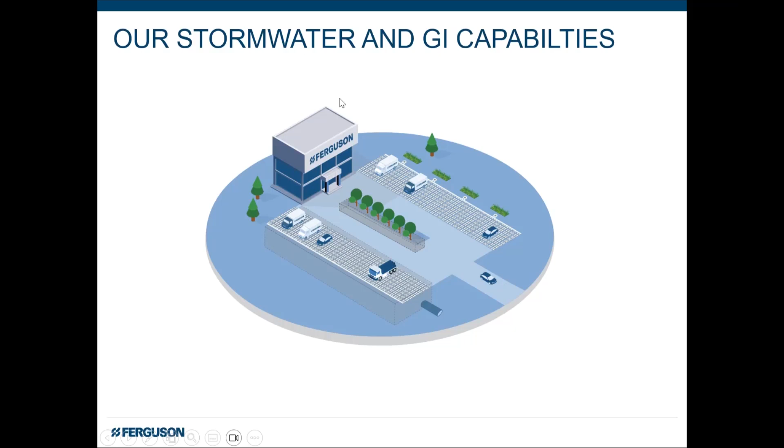To give you some background, I just want you to know kind of where we come from. Ferguson Waterworks, we are a stormwater distribution company. We sell products, anything you can think of in the water industry. I think that's really important because as we talk about collaboration today, it's really important to have that product expert near you, involved in your project, so that when a challenge comes up that can't be solved with something natural, there are products out there we can use to solve some of those challenges. As Bob mentioned, I work specifically in the green infrastructure space.

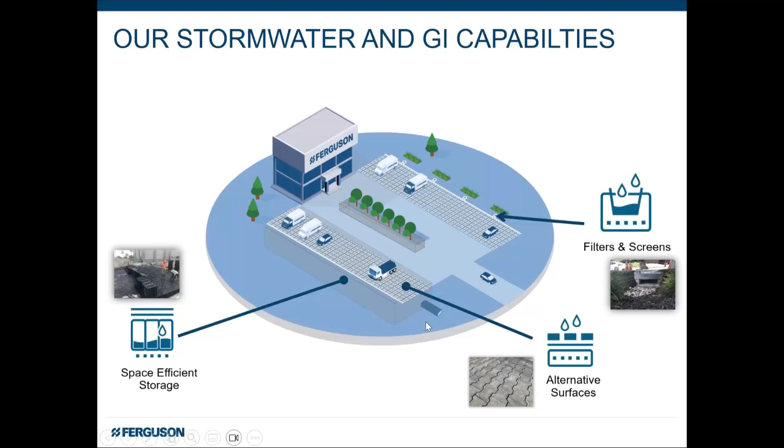Our products are categorized into five categories: space efficient storage, alternative or porous surfaces, which I'm going to talk about today, filters and screens for pretreatment, which I'm also going to talk about today, media and biofiltration for cleaning stormwater and managing volume, and something really cool we've been getting involved in, urban landscapes—essentially creating healthy places for urban trees and plants to thrive.

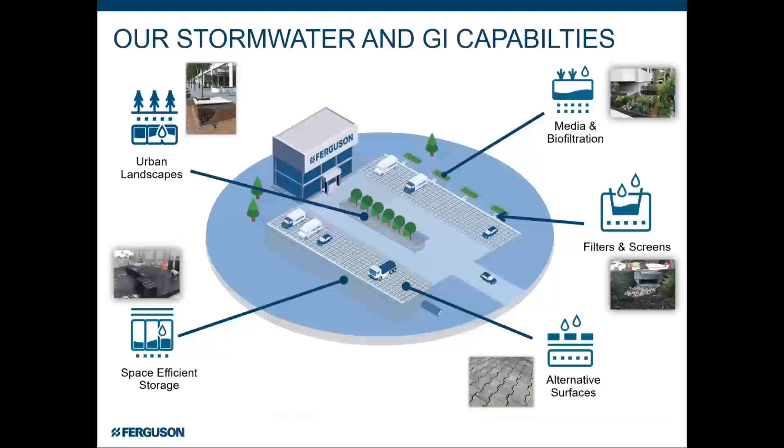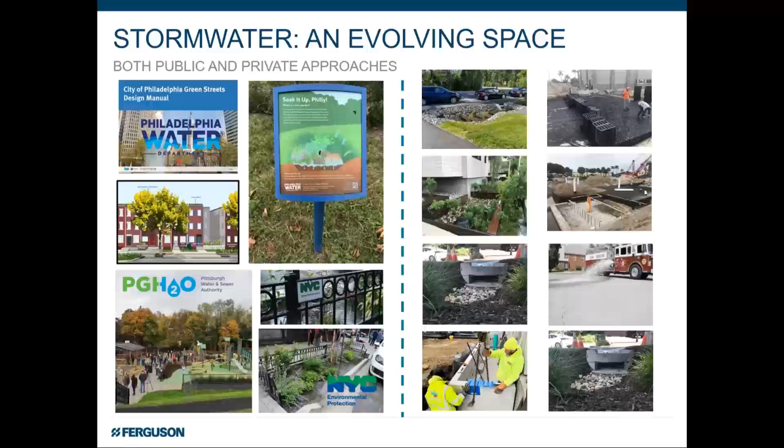Again, we're only going to focus on a couple of these categories today. We work with cities and counties, and many folks here are from all over the country. Normally, green infrastructure starts with a city or county dabbling in this space, but we also work with private developers. They're two very different audiences with very different goals, so we bring a lot of experience to the table to have these conversations with you.

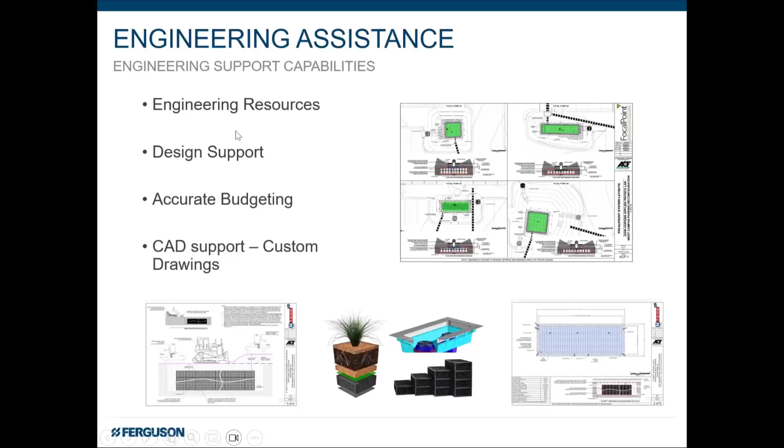Again, we support these projects. Ferguson has an engineering services team—we don't sign and seal anything, but if you see some things you like today, or there's things I'm not going to cover today, we can technically support those for your landscape architects, municipalities, and civil engineers. We also do job site support. Very important: we do not install anything, but I just got done with a pre-construction meeting today for one of the products we're going to talk about, and we're there to help answer questions and make sure these things go in right. They have to go in right to function long term.

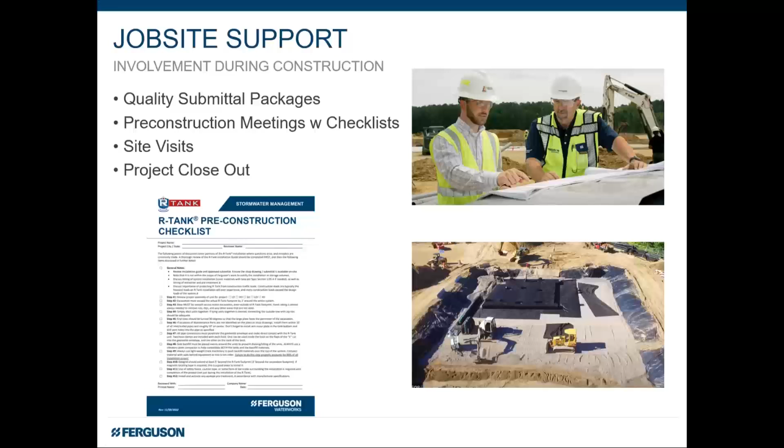We've learned a lot being in the field with these contractors. Last but not least, we support municipalities. As you start to dabble into this green infrastructure space, or maybe if you've already been doing it for years, we've got tools, tricks, and tips to help you get it done. I love these public outreach placards where you tell the community what you're doing, because sometimes these things are new and they look a little funky.

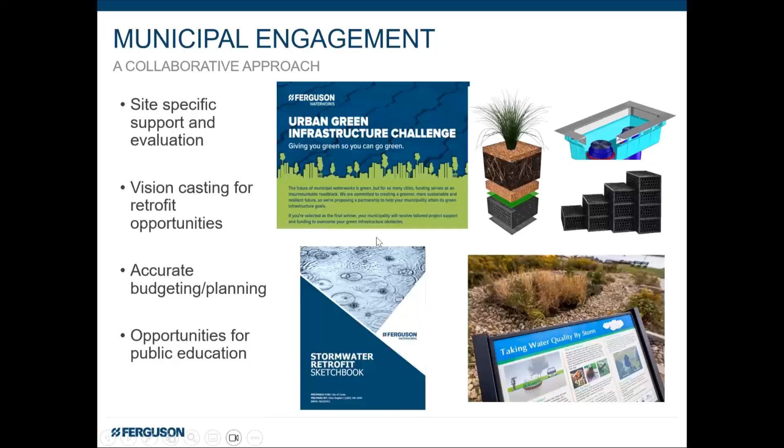So we come with a lot of experience working on projects, and we're going to bring some of that to you today: green infrastructure.

Green infrastructure is different, right? It says, let's mimic nature and how it used to be. Before we built on everything, we want to capture that rain on property. We want to try and soak it into the ground, but ultimately we really want to slow the flow of water down.

So I think one of the common misconceptions of green infrastructure is, 'I have bad soils, I can't do green infrastructure.' Not true. We're ultimately just trying to slow down the flow of water, and we can do that even if your soils are bad. So keep that in mind when you're talking about sites.

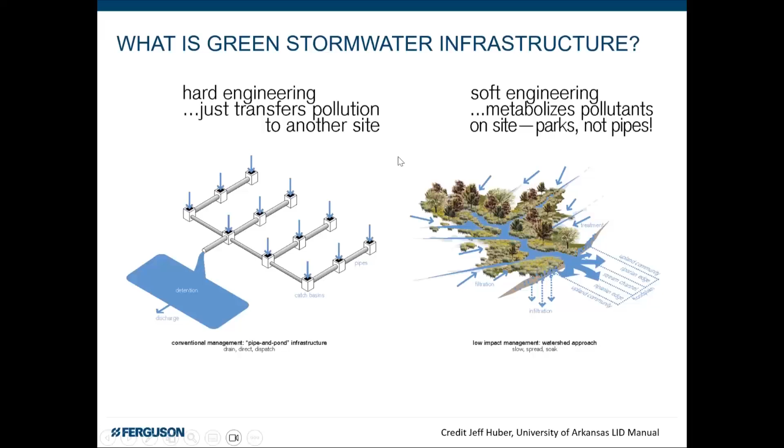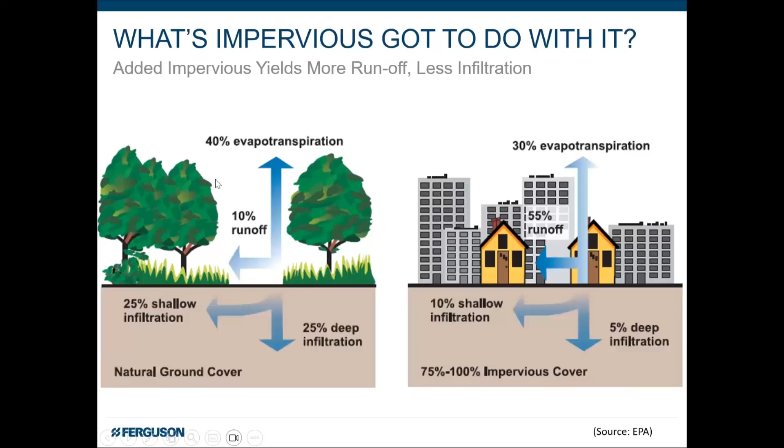That means it's going downstream into a water body, it's going into a conveyance system. So it creates a lot of problems. And that's why I think green infrastructure is important, is we want to get back to basics.

Another big thing, aging infrastructure. Think about your infrastructure in your area. Pipes were put in the ground 50, 75, 100 years ago. They were put there to serve a certain population, a certain amount of impervious area.

I don't know about where you live, but everywhere I travel, the population's growing, which means we're building more and more, but guess what hasn't changed? The pipe size. So we're trying to put 3 times, 10 times more water in a pipe that just can't take it. And folks, that's why we're starting to see flooding in areas where we never saw flooding before, with those afternoon downpours, rainstorms, because the infrastructure just can't take it.

Green infrastructure gives you an opportunity to change that. You can do it in all kinds of different ways.

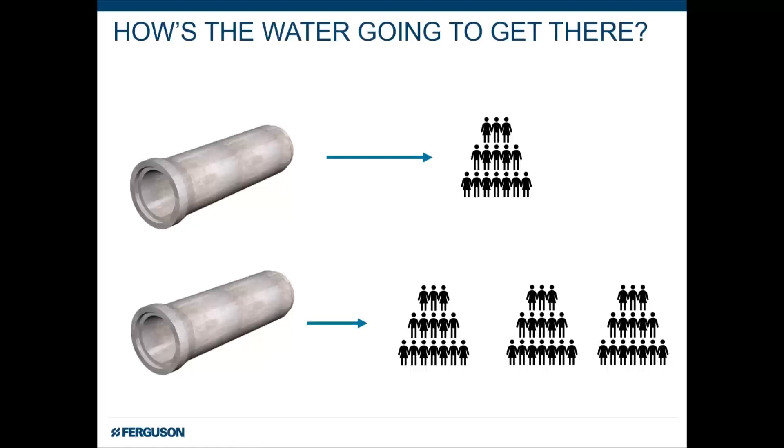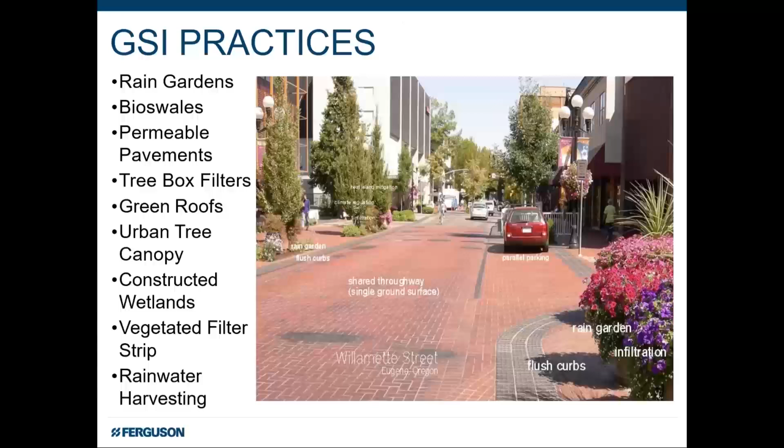Pervious surfaces, tree wells, rain gardens. There are so many different methods that you can utilize besides a pipe and a drain, and I think this is a better way to go about doing things. All these can be added without digging up a street, right? Which is great, so promote green infrastructure.

I think you can kind of start to tell I'm passionate about green infrastructure. What's getting in the way? Well, I think it's important to talk about these things, right? A lot of times you hear people say it's too expensive.

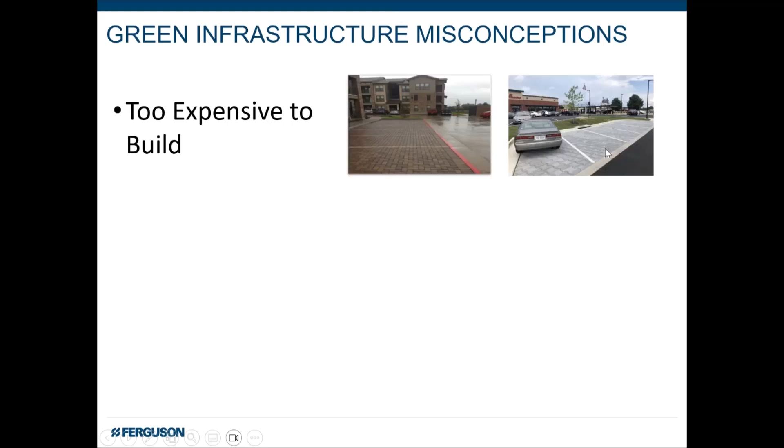Well, this is a paver. It's a paver that's beautiful, and it operates like asphalt or concrete. Here's a paver that's beautiful, but it lets water go down through it. Is there really that much difference, right?

Too expensive to maintain? I encourage all of you to look at the gardens in any retail center you go in. There's a big curb around it, and it's beautifully landscaped. This is a rain garden. Landscaping looks the same, you've got to weed it, mow it, trim it, but that serves as a stormwater asset. Are they really that different?

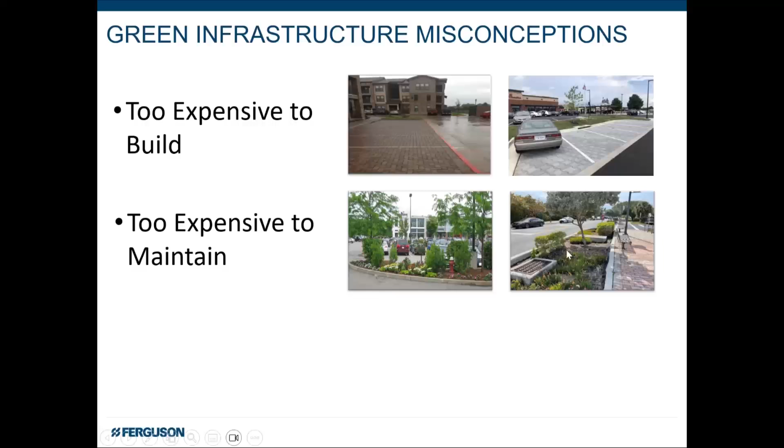And this is my favorite: too expensive to repair. When the pipe breaks, let the fun begin. Rip up the road, tear down businesses, make mad drivers like me. Green infrastructure assets are usually at the surface. If something goes wrong with them, they're pretty easy to repair and fix, and you don't have to go tearing stuff up. So I would encourage folks to think a little differently about green infrastructure.

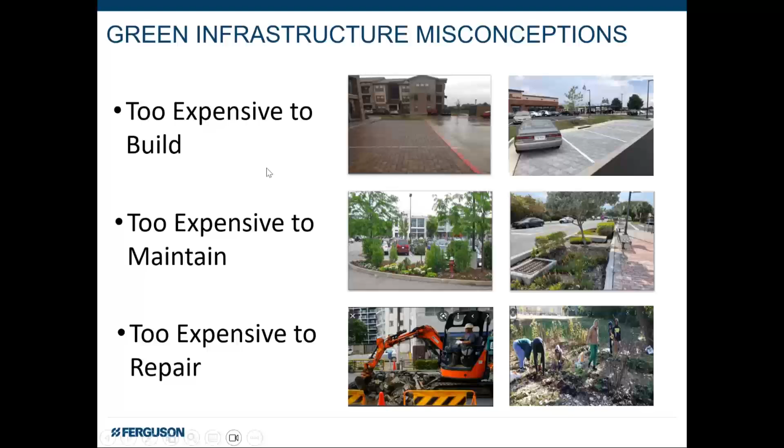I don't think it's as bad as some people make it out to be. And I love this, my old dad used to tell me this growing up: you're nuts if you think you can keep doing the same thing over and over again and get a different result. Bigger pipes aren't equaling less flooding or less nutrient pollution downstream.

So I would encourage everyone to start to embrace the green infrastructure journey. I think it's a much, much better way to manage water, and it's important. It's important for municipalities for several different reasons. Number one, it's going to limit localized flooding, afternoon storms, and things of that nature.

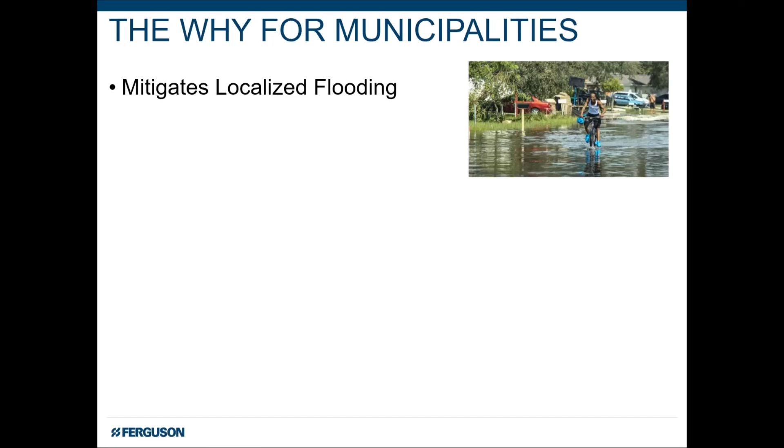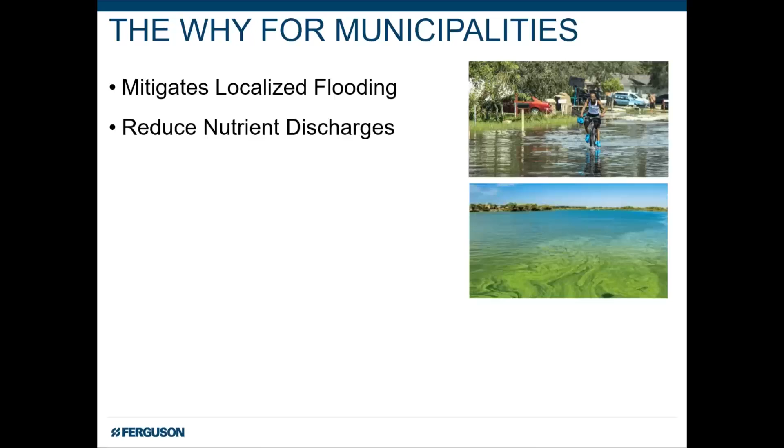It's proven to do that. It's going to reduce nutrient discharges. Remember what I said, when you put water into a pipe and that pipe goes into a surface water body, it's bringing all the nutrients with it. If we can keep that water on our site, we're not putting the nutrients downstream, and you're not seeing algal blooms and other bad things that go on with dirty water. Recharge aquifers, this is really important in areas like where I live in Florida. It helps push out some of that sea level pressure that you get from the oceans.

I love this one: reduce pressure on municipalities to clean other people's runoff. Think back to what we looked at: 55% of the water that hits a private site becomes a municipality's problem. What if we could reduce that by 5 or 10%? Would that be important to that municipality? And finally, money, folks. If you think about traditional stormwater management, you have a lot of retention ponds. Those retention ponds aren't generating any revenue, but if we can get rid of that and fold the stormwater management into the landscape, now we can increase tax revenues for municipalities.

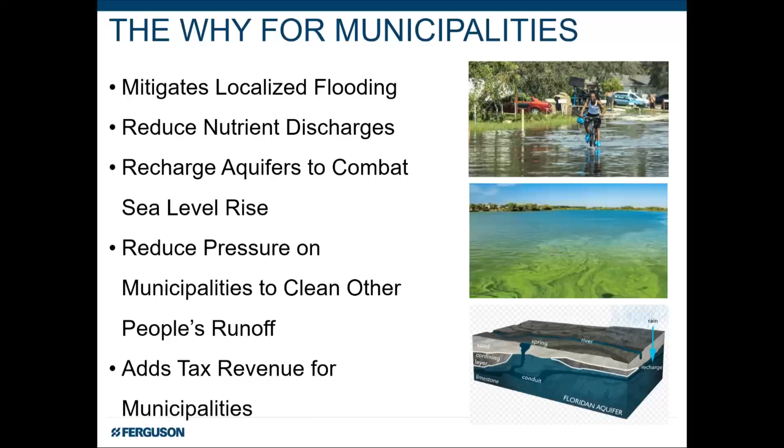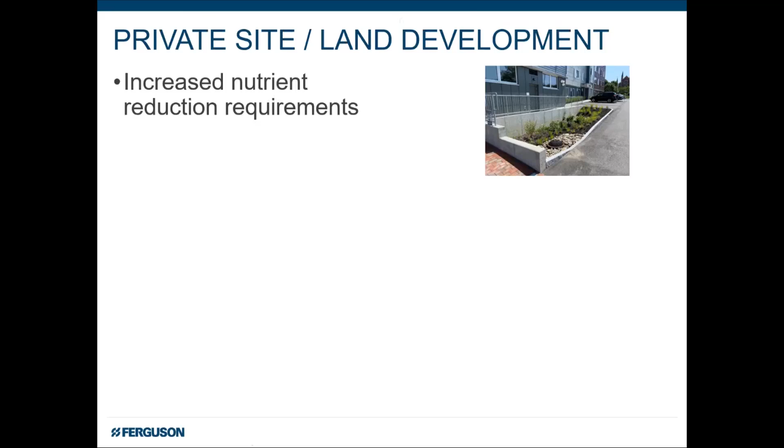Developers are totally different, and they care about different things, and we've got to think about that when we're designing sites. First and foremost, there's increased nutrient reduction requirements all over the country. Green infrastructure can help them achieve those goals. Many cities and counties are actually implementing green infrastructure manuals. Well, now I'm a developer, I've never done this before, how do I do it? It's expensive, they've got to be thinking about that and put it to use.

In good ways, they're building on the worst sites. If you think about it, if I came to a new city, I'd want to build on the highest land with the best soils. Those are all gone, so there are some challenges built around what type of land they're building on. More buildable space - at the end of the day, folks, developers want to put as much building and parking as they can on their piece of property. A pond gets in the way of doing that.

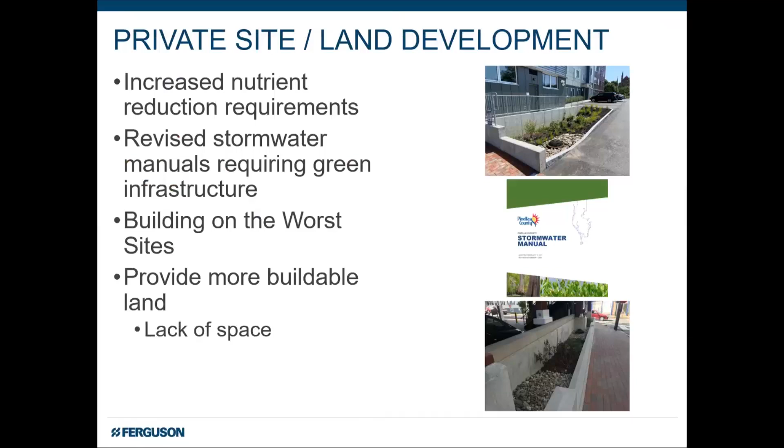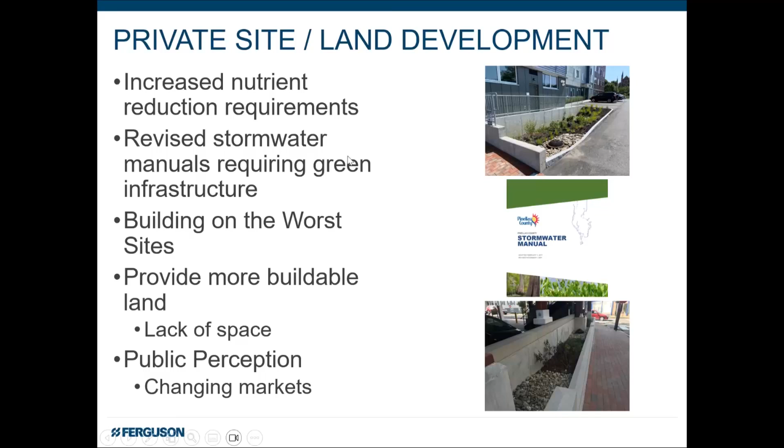So that's all my stuff now. We're going to really dive into some case studies, as I would call them.

So again, we work with municipalities all over the country. This division was really born in the Northeast, so we've done a lot of work in the Northeast with these groups. And the one thing that all these people have in common is great green infrastructure programs. Some have been around for years and years, some have only been around for a few. They all care about maintenance. They all recognize that we must perform maintenance, design with maintenance in mind, to make sure these assets perform and last long term.

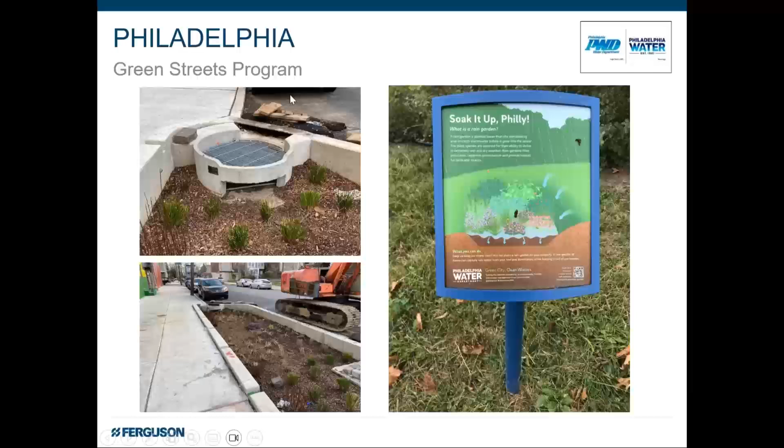So we're going to look at a couple different municipalities today. First and foremost, we'll look at Philadelphia and their Green Streets program. We're also going to look at New York City, and we're going to look at a couple different things with New York, which is kind of fun for me.

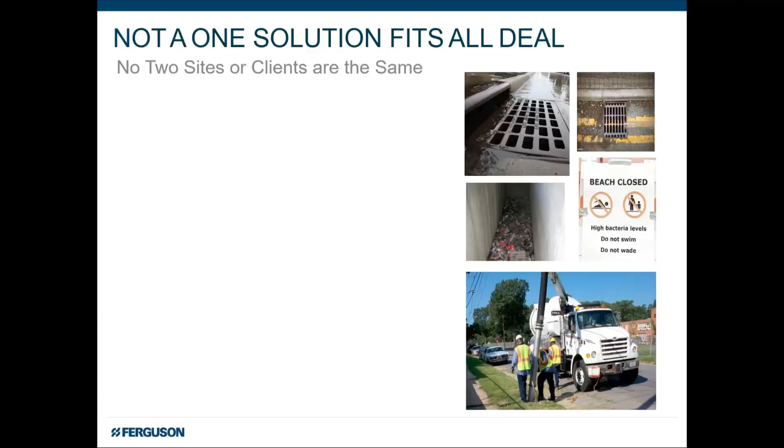So we'll dive right in - we've got two different municipalities, something to think about when you're designing these green infrastructure projects. Number one, there's a lot of variables, right? No two cities are the same. How big's the site? What kind of space is available? Are there pollutants of concern? If you're dealing with grates or inlets, which we're going to talk about, what do those look like? And then slopes can create a lot of water velocity - those can create challenges as well.

So again, you've got to think about these things. And the other thing you've got to think about - maintenance, we're going to talk about today - budgets, equipment. Does your city or county have the ability to maintain these things with the equipment, or do they have the money set aside to do it? Do you want these things to look pretty? Are they functional, or are they just get the job done? And winter consideration - in Florida, it only gets down to about 60 degrees, so I don't know, but I hear there's snow in other places, and you've got to factor that in.

So again, joking aside, that's always something you got to be thinking about too in your areas. What are we going to do when it snows or it ices?

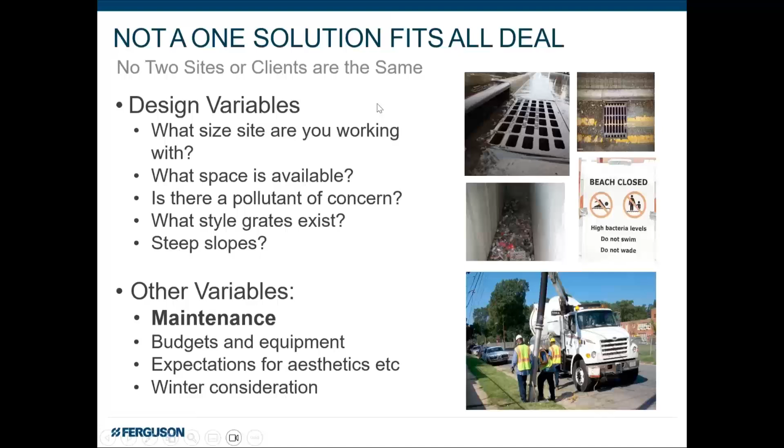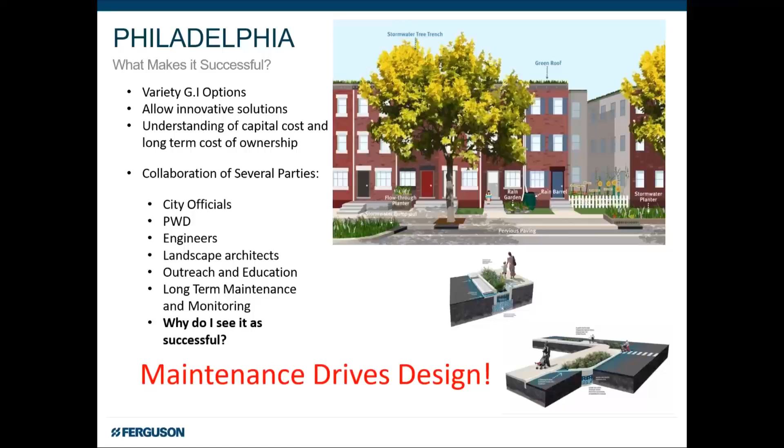No two cities are the same. Keep that in mind as we dive into Philadelphia. Unbelievable Green Streets program, always thinking about green infrastructure. It's a great program for a couple of reasons. Number one, they've got a great variety of options to use. They understand and budget for maintenance, and everybody's involved, so there's a ton of collaboration. But the real reason it's successful is because maintenance is always driving design. They're always thinking about it.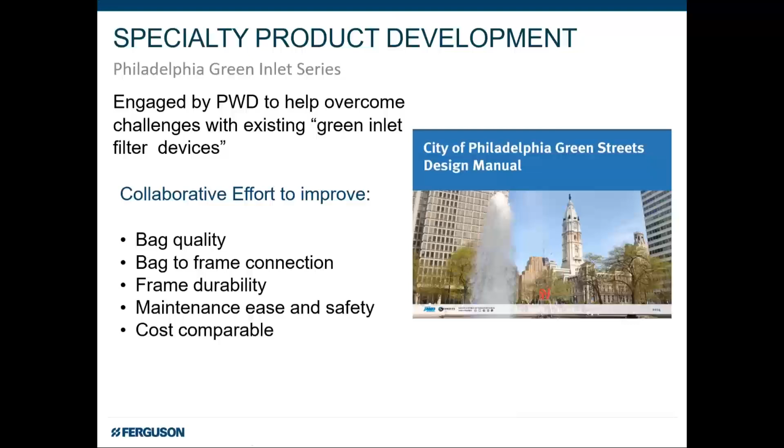So what I'm going to talk to you about today is this Philadelphia Green Inlet series. They have a ton of drains throughout their old city, and they've got to keep sediment, debris, trash, and things like that out of the drains, out of the conveyance system. So they got with us at Ferguson and a bunch of other people and said, hey, we want to update how we're approaching this. This is really my favorite, and the one where it started.

They've got these interesting drains all around the city with a very small feed throat that you can see. All the dirt, debris, trash, and sediment comes into these things. What they were doing is, basically the whole length of this opening behind the grate, they put this little rectangular filter. Makes tons of sense—dirty stuff comes in and collects it all in that container.

Maintenance would go out to the site and say, oh, this thing's full, time to clean it out. So they'd pop the manhole, reach down in there, pop this little guy off, and then turn it sideways to pull it out of the manhole—and all the garbage fell back down into the hole. The maintenance guys were saying, why do we even have these things in here if every time I service them, I dump half the stuff back in? Doesn't make sense. They cared, and said, you know what we're going to do? We're going to lay in the street with our feet in the middle of the road, and reach through that hole, and just take everything out by hand. So dangerous. The city said, we've got to do something about this.

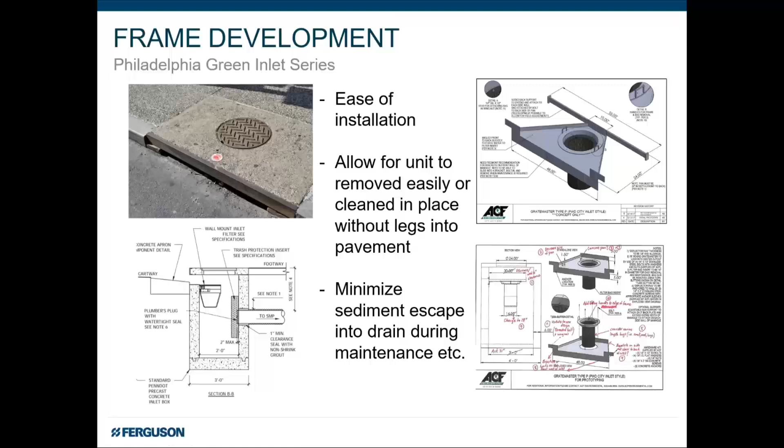Let's design something different. You're seeing some iterations here, and what ultimately came to be was this guy. This actually sits in line with that manhole cover. There's a little flume that directs all the flow into this device. Notice it's a filter bag, it's a fabric—relatively inexpensive to replace when they wear out. I also want you to notice some color differences here: really dense here, very small openings; bigger here, bigger openings. Collaboration, remember I talked about that?

Maintenance said, you know what, we don't want to collect fine sediments. We recognize that's a problem, but when we've got to pull these bags out to maintain them, they're heavy—we don't want a lot of sediment down there, we'll never be able to get them out. Engineers were all saying, no, we need to get everything. So this was what I call the line of collaboration. Maintenance got what they wanted—big holes on top—so there's only going to be a certain amount of heavy sediment that gets collected. And engineering got what they wanted because they got a lot of sediment control. Unless it really fills up, they're probably going to get a majority of what they wanted. This made it so maintenance can just pop the top, take that out—no more feet in the street—and it's customizable.

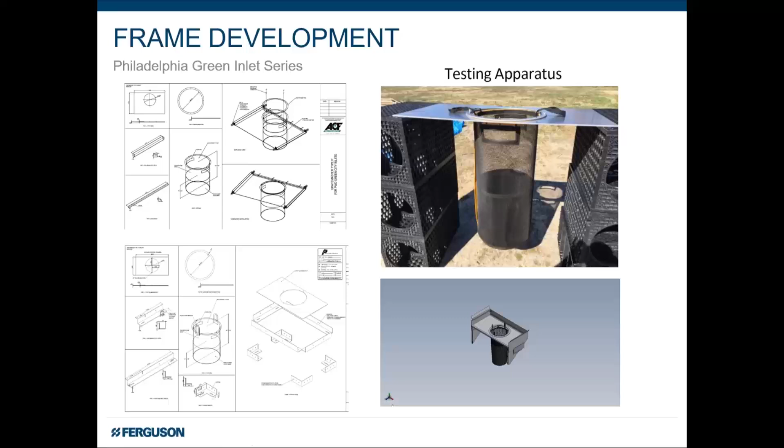Remember what I said, all these things could change, and they all changed based on what Philadelphia wanted. That was part of the program. The other part was introducing a new bag. I showed you that bag—they had a single layer bag, and they were replacing those bags about once a year. When maintenance would pull that out of the hole, they would drag it across the ground to dump it in their garbage can or pickup truck, and the bags were getting holes in them. So we came up with this three-piece design, a much more durable bag. We increased life expectancy from 1 year to 2 to 3 years, which basically cut their budget by about 50 to 75%.

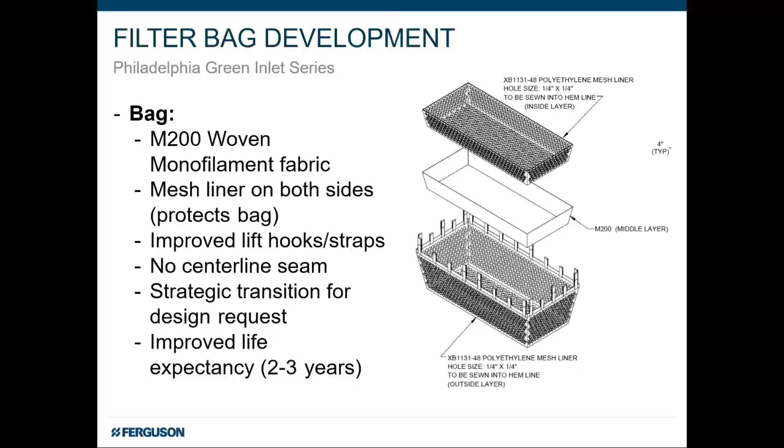Everybody was really, really happy. We did this again through collaboration with the maintenance team telling us about their challenges, the engineers, the product specialists, us at Ferguson, and then we pulled one of our manufacturing partners in to help us figure out how to craft and design these things. Again, customizing a solution to meet their needs, thinking about maintenance and what's going to make it easier for everybody. So this was their final product line.

Again, this was that little filter I showed you earlier. This was their Green Highway Filter. This won a really cool award from the Sustainable Business Network of Greater Philadelphia for innovative product. I really think it was cool to see all the parties come together. I think they should have got an award for collaboration because it's rare to see the maintenance team actually included in some of these conversations, but they got a ton of knowledge and can probably help with some of these things.

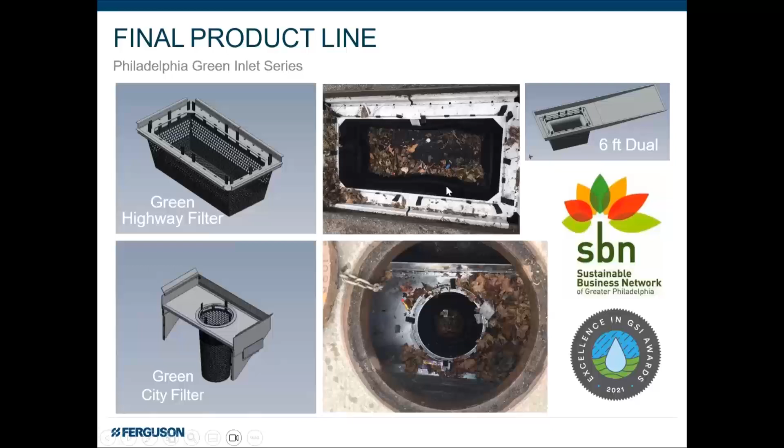So now let's switch gears. Let's go to New York City. We get a call from New York City and they say, hey, we need filters for pretreatment. We go, we got this thing whipped, we just got done solving all Philadelphia's problems, we got your perfect solution. And we went there and this is what we saw.

Remember what I said earlier, no two cities are alike, everyone's challenges are different. So these are what they call infiltration basins. This is their pretreatment for the infiltration basin, and this is what they look like. Disgusting. These are all over New York City and the five boroughs. So what they said was, we don't care about sediment, not our problem. We care about all that nasty trash.

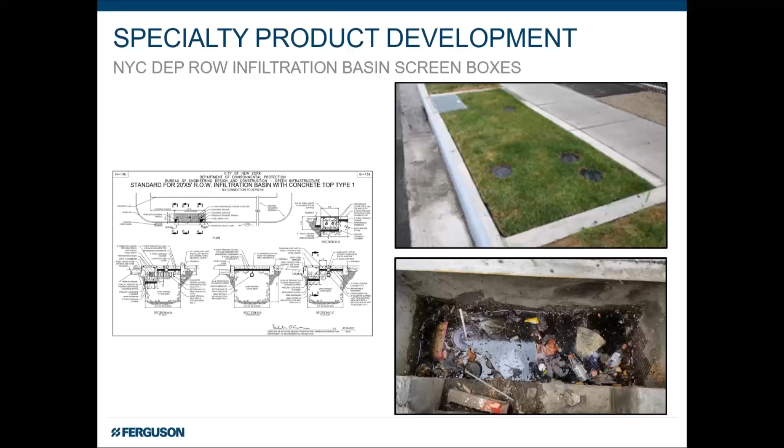So this is what we developed for them. Some interesting challenges here, very old infrastructure. You can't just buy a filter off the shelf and pop it in there. They had to create some interesting ways to get this thing to lock in. Again, we were able to do that with our manufacturing partner. They wanted something that was going to be more permanent. They didn't want a filter bag. They wanted something made of stainless steel, aluminum, not going to have to replace it.

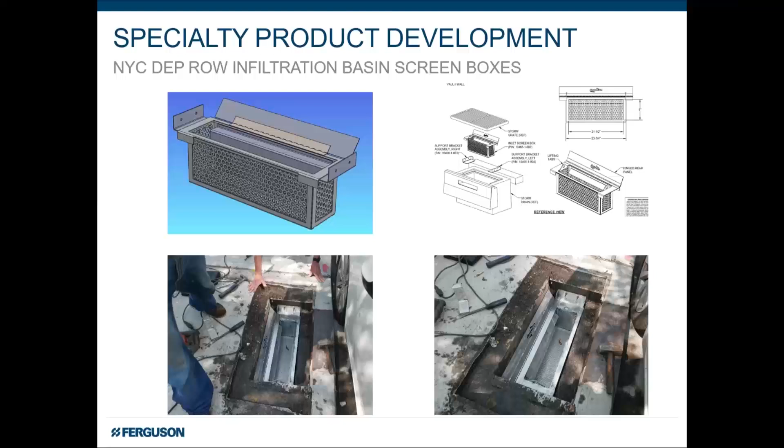And look at these big old holes. They don't care about sediment. Sediment, have fun, go down the drain. We need to capture trash. That accomplished that. So again, another example of a city with a pretreatment problem, this one specifically for green infrastructure, two totally different goals. All these things can be customized, again thinking about what maintenance is.

I just want to mention, how do these things get maintained? Most of those you pull out, you dump them, and then you put them right back in. But if you're a city that has dozens, hundreds of these things, which Philadelphia is one of, it may make more sense to use something like a vac truck where you just pop that manhole lid, you vacuum the inside of it out, and then you put the lid back on. So that may not be easy with an inexpensive bag like I showed you initially, but for some of these more durable stainless steel, aluminum type products, this is traditionally how they're maintained.

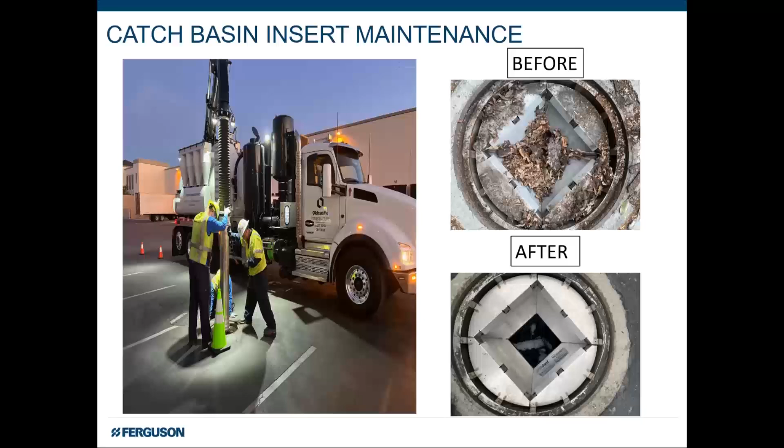And then to tie that back in a little bit to green infrastructure, pretreatment's not just for drains. Pretreatment is also for green assets like rain gardens. There's so many different options to use, but check out how these work. They literally sit right in the curb line. When that rain enters that facility, now I'm grabbing all the trash, all the debris, the floatables, leaves and everything in one centralized place. And I'm not grabbing it all out from here.

So sediment that normally clogs up rain gardens or bioswales, I'm capturing it in pretreatment. All I got to do is pop that lid, scrape out the debris, put the lid back on, and have a nice day. That's a permanent asset, and it makes maintenance so much simpler. So just something to think about. I kind of want to tie that inlet protection back into green infrastructure.

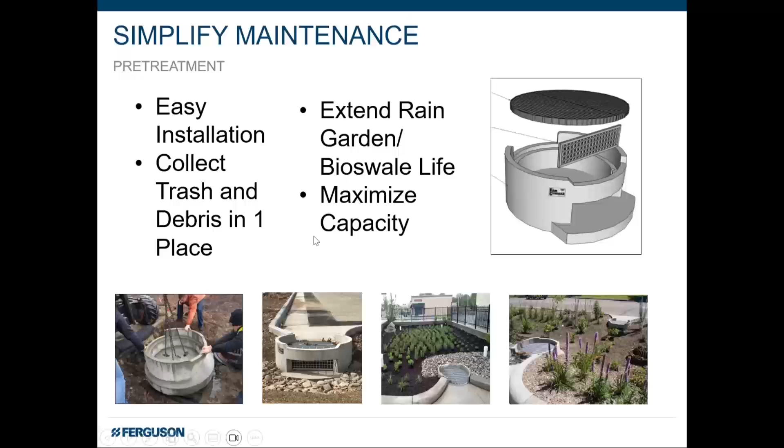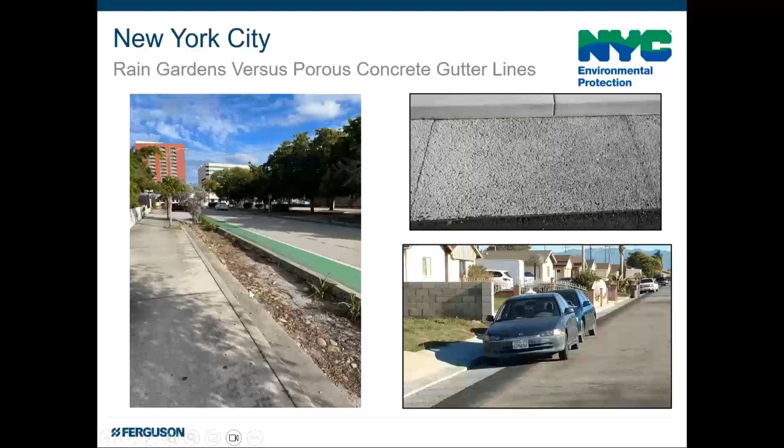And now let's switch gears, staying with New York City, but talking about maintenance and the big challenge they had with these rain gardens. I showed you the infiltration pit, which is basically sod, and down below that is all stone, so that's operating like a storage facility. But then they've also got these types of rain gardens here with no pretreatment, so dirt, debris, trash goes into these things, and they got to maintain them.

Something very interesting happened during COVID. New York City said, streets are closed, the roads are a lot less busy, we're going to install rain gardens.

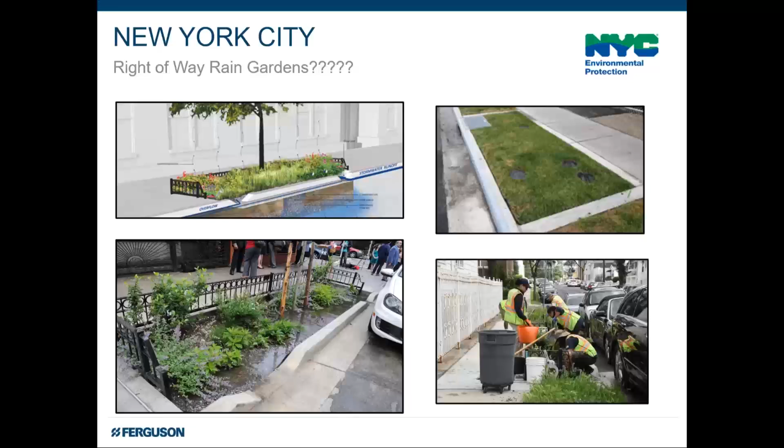They realized really quickly, no more rain gardens, but we need green infrastructure. What are we going to do? That's when we introduced this.

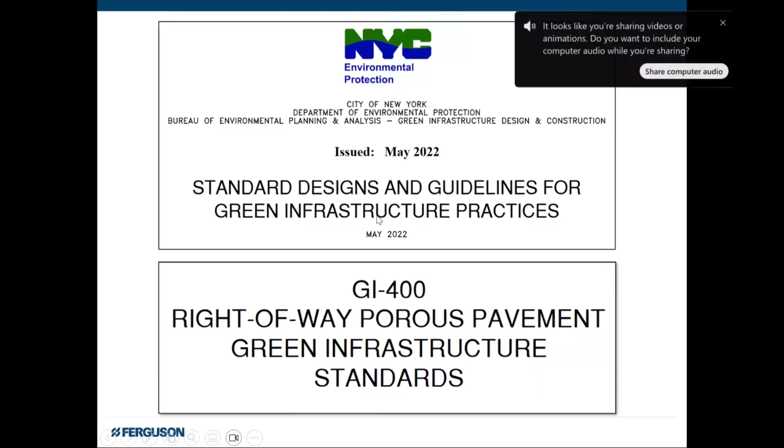Yep, I am. Don't leave me alone. I'm afraid to hit this button, but I'm going to do it. Okay.

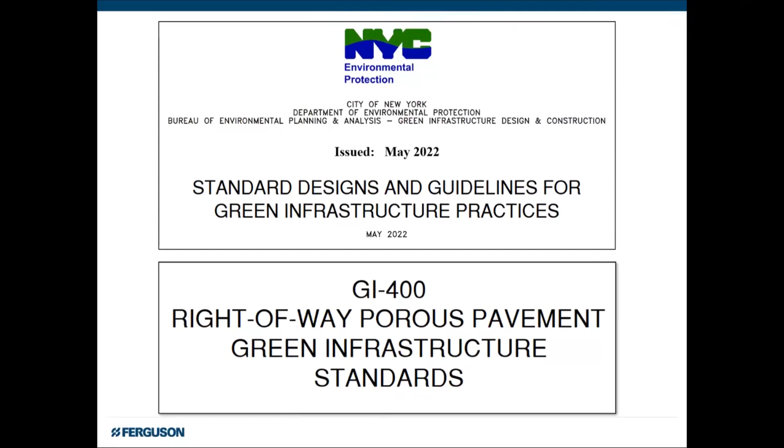This is when we went to this porous pavement. Still green infrastructure, porous surface, but they found it way easier to maintain.

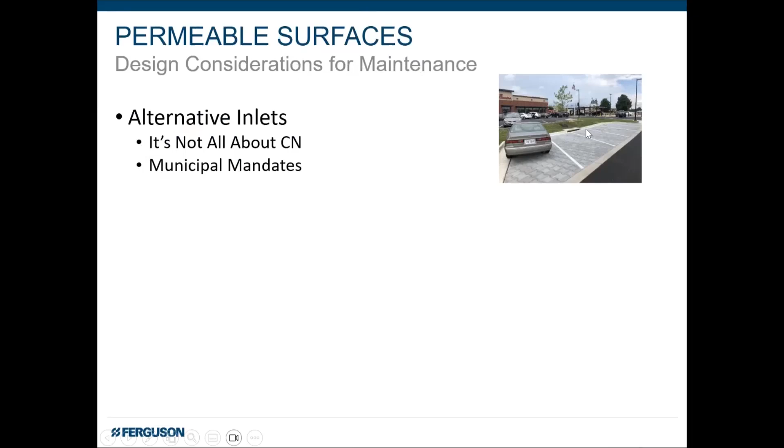Okay, so when we talk about permeable surfaces, a few things to consider when you're designing for maintenance. Number one, I like to tell everyone, these are alternative inlets. You're not checking a box because the city told you to put in some pervious pavement. No, use these things like assets, right? You can get a lot of water off the surface in some really cool spaces, and you can do that by running water or directing water to them, okay.

One thing that I always tell folks to consider: run-on ratios. In a perfect world, 1 square foot of pervious surface would receive 1 square foot of impervious run-on, a 1-to-1 ratio. The worse that ratio gets—in other words, if it's 2-to-1 or 5-to-1—you're sending a lot of water to a really small area, and that's when things get clogged with sediment, debris, things of that nature. So I like to see run-on ratios at 5-to-1 at the most, but I'm happier in the 3-to-1 range.

Sometimes cost doesn't allow that to happen, but that's one thing to consider. The higher your ratio, the more maintenance you'll need. A lot of grants pay for construction, not maintenance. Maybe think about increasing your pervious area—it'll reduce the amount of time or the number of times you have to maintain it every year.

What's around? Look around. What water is coming to the site? The most common pervious pavement or permeable surface killer is sand and silt. So if you've got unvegetated areas around, and when it rains it's putting all that sand and debris onto your permeable surface, odds are you're going to have to maintain it more. So pay attention to what's coming around, and use vegetated buffers—in other words, grassed areas or things like that—as much as possible.

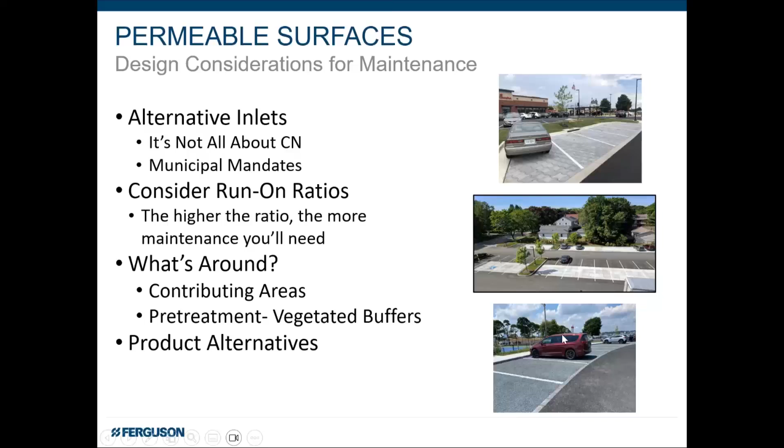And consider alternatives. You're about to see something that's pretty unique that you may not have seen before, but there's all kinds of neat stuff. This here is a plastic grid product that you can put soil and grow grass in, or put rock in it. I think it looks really nice. And guess what? The water just disappears when it hits it. So consider things that aren't maybe porous asphalt or porous concrete, which have been those historic or traditional products.

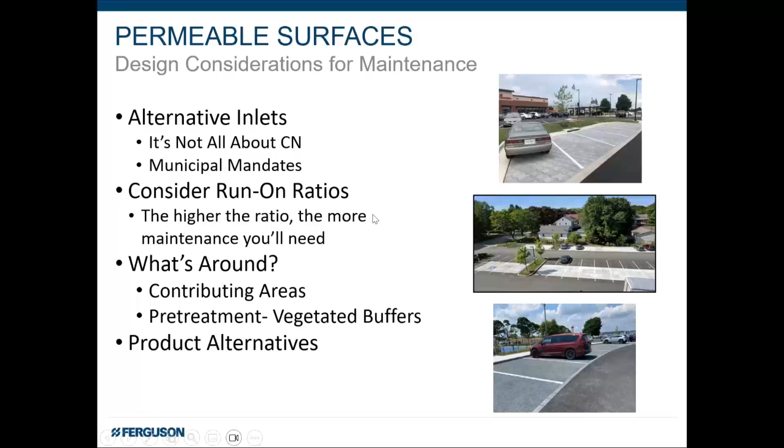So here's New York City, and I love this concept. New York City basically has a combined sewer overflow, so they said, we do not want stormwater going into that system. How do we keep the water out of the pipes? Well, these are porous concrete panels. Notice the lines in them—I'll get into that a little bit more—but basically on the curb line, they're putting these things in.

They're about 4 feet wide. Garbage trucks run over them all day long, dump trucks, you name it, doesn't matter. But they did this because remember the 11 maintenance crews I showed you? Now they've only got one.

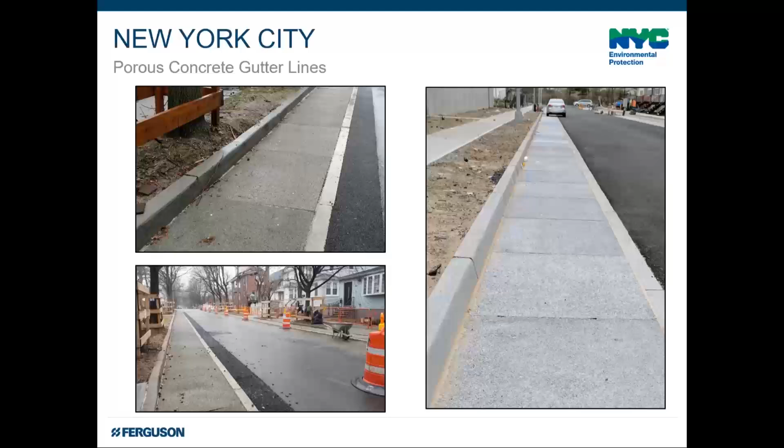One other thing we did on this project: here's the porous concrete panel. There's a stone base that provides support so that it can take a full traffic load. And this one was pretty cool because we put underground storage in it. Remember what I said—New York City wants to keep the water out of our CSO, the combined sewer overflow. They want as much storage in a small area as they could get. And these underground detention products, particularly this one, give us 90% void space. Stone typically gives us 40%.

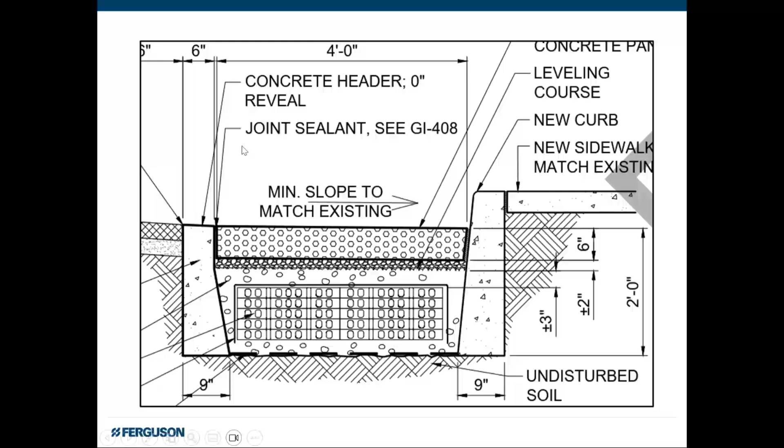So this is what the detail looks like. This is how they maintain it, and I absolutely love this. It's just a vac truck, but they've created this little attachment that sits off to the side. There's one human being in this truck maintaining miles of porous gutter line every day by himself—one human, not 11 maintenance crews times 3 people. So this was a much simpler maintenance plan.

This is something they could really wrap their arms around. They understood this, and it made it so much simpler for them to maintain.

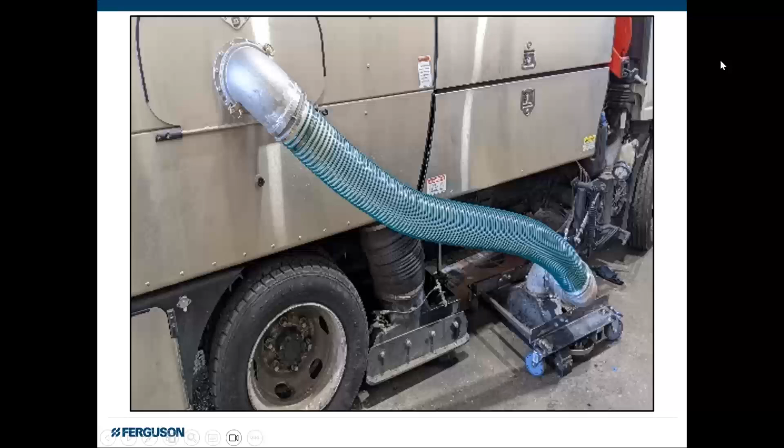I'll take just a sec to talk about porous pavement maintenance. There are lots of different options here. This was a really neat vehicle I saw at a municipality down here. It's on a Bobcat chassis, with 500 gallons of water back here, and this is the vacuum. I liked it because it could really get into on-street parking pretty easily, and it can get up on a sidewalk really easily. There are big trucks, and there's walk-behind equipment like you see right here. This was actually a test facility at a university. They clogged it up to see if they could make it fail, and then brought it back to life, which they did. So there's a bunch of different technologies out there.

I like to provide pricing. This is in Florida, so please understand this isn't going to hold true everywhere. But I like to quell that fear of it being so expensive to take care of. If you've got a huge parking lot, some people are only paying 25 cents a square foot. If you've got smaller areas with traffic, it goes up, but built in, it's not that expensive to take care of.

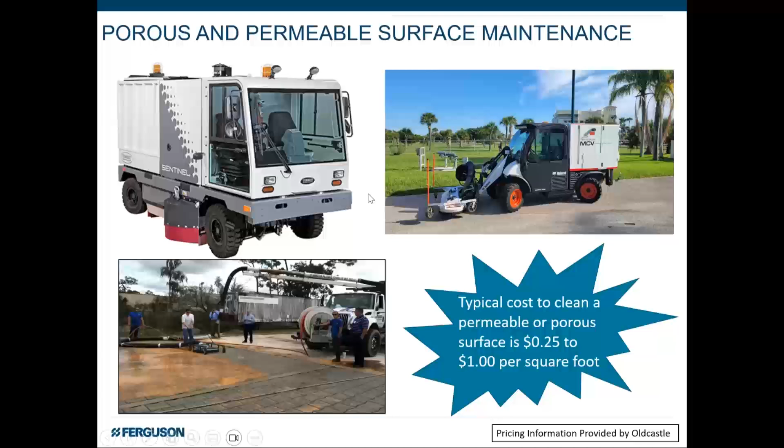So anyway, this is how you maintain that stuff. Again, this is what one of those porous concrete panels looks like. I love it because it's pre-manufactured in a facility, it comes with a warranty, it's really simple to put down on the ground, and it takes a full traffic load.

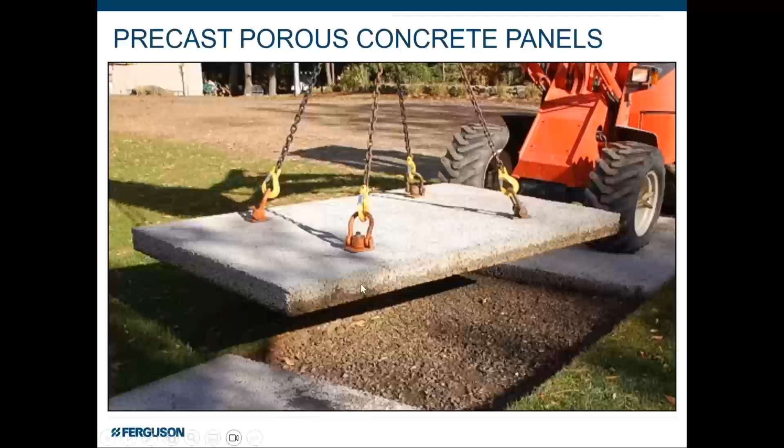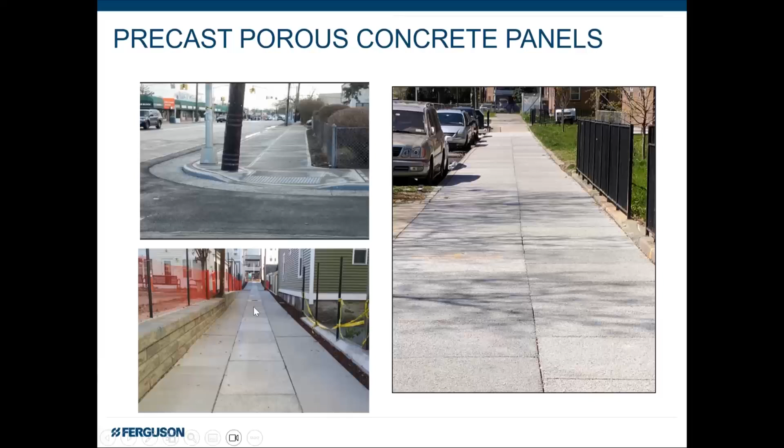It's super versatile, so you can see we use them around curb lines. Why do we put them here? Notice how it's just there. Have you ever walked in the street and seen a gigantic duck puddle, a bird bath right there? It's dangerous for pedestrians and also dangerous for cars. This gives the water somewhere to go. On sidewalks, we're seeing it more and more—these panels are already built like the width of a sidewalk. And then green alleyways—this is a really cool retrofit thing we're starting to see in cities and counties, and this product works great going right down the middle of that. So there are unique ways to use it.

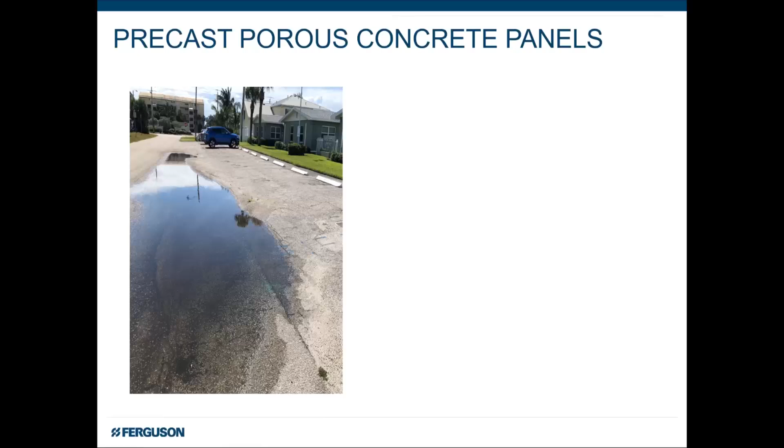This is that puddling issue I was talking about. This was a municipality that had a parking lot that was 30 years old. Historically, the ground had just settled, and they would either have to regrade and repave the whole thing, or cut out a section of that asphalt and put a few of these panels in. Now the water doesn't sit there anymore. You can see how dirty this was—this was actually after a hurricane here in Cocoa Beach, Florida. But it's easy to vacuum and easy to maintain. This was put in five years ago, and these residents are still high and dry and as thankful as they could be.

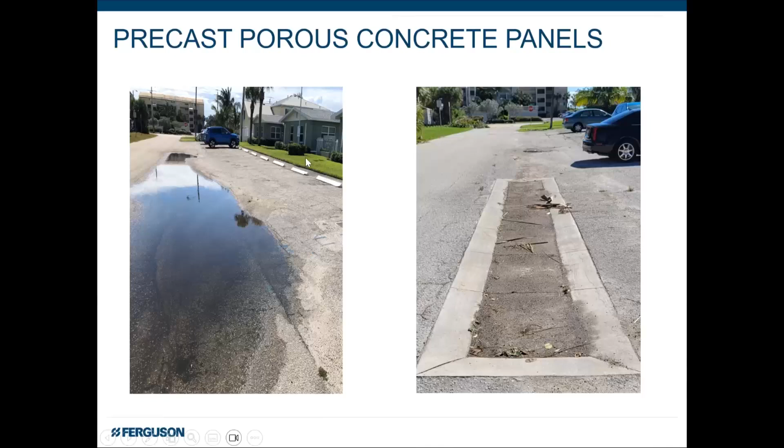So as I wrap things up, just some final thoughts here. Collaboration is critical to the success of projects. Get as many people involved as you can, get different perspectives, talk things through, and try to come up with what's best for your particular project.

Maintenance has to be a part of the conversation. Any green infrastructure asset you put in, if you don't maintain it, I can promise you it's not going to work long term. Talk maintenance. If you can't afford maintenance or don't have the assets for it, don't put the green infrastructure in, because you're probably going to be left with a sour taste in your mouth.

Pre-treatment is a common theme with all the cities we see that have great maintenance programs and maintain the longevity of their assets. So things like pre-treating before rain gardens, inlet protection for your gray and green infrastructure, and being smart about how you design your permeable or porous surfaces—all really important.

Every city and county is unique, as I talked about, so don't think just one solution is going to solve all problems.

And last but not least, collaboration doesn't happen by accident. My dog's cheering on collaboration, by the way—one of the joys of working from home these days. Sorry, but collaboration doesn't happen by accident. You've got to choose, so be that change leader. Be that person that says, hey, did we talk to maintenance about how they're going to manage this? Did we think about how we're going to take care of this long term? Be that change champion and collaborate with others. I think it's really important.